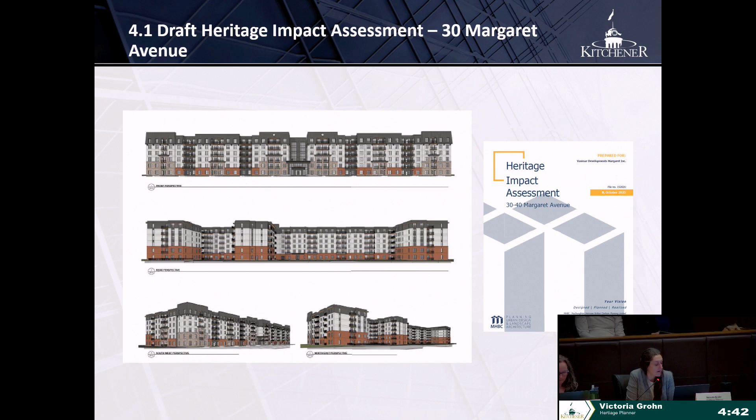The HIA is a required submission of a full site plan application. The development proposal contemplates a 6-story building with 261 residential units. This property may be familiar to some members of the Heritage Kitchener Committee, as this is the third development proposal that's come forward on this site.

As a reminder to the committee, no decision on this development will be made this evening, and the report is still in draft form. The purpose of circulating the HIA to the committee is to receive comment and feedback on the development proposal, and for staff to take back these comments as we continue to undertake a review of the application and work through the site plan process.

That concludes my portion of the presentation, and I'd now like to turn it over to Christy Kirwan and Dan Currie from MHBC to present the draft report to the committee. Thank you.

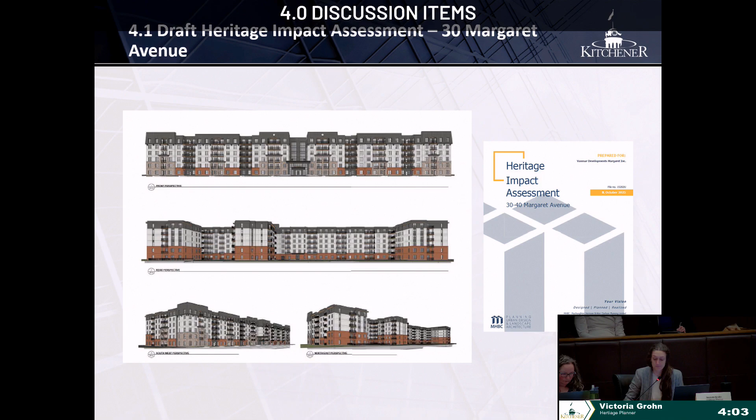So we have our delegation, and then Dan Currie and Christy Kerwin. Are you here? Okay, thank you. So Dan, you're going to do an overview then of the presentation. My mic is on. Just doesn't come with the red button.

Thank you, Madam Chair. Christy and I are with MHBC and prepared the Heritage Impact Assessment. Also with me from MHBC is Andrea Sinclair, who is planner on the file dealing with the site plan application. Paul Levesque and Catherine McCutcheon are also here representing Vanmar, the developers proposing to develop the building. If there are any questions that relate to their areas of expertise, they can assist.

So I've got a few slides. I'll endeavor to move through several of them fairly quickly and not repeat the overview that Victoria gave. But this is a large parcel on Margaret Avenue that I expect the committee and the members of the public here are well familiar with.

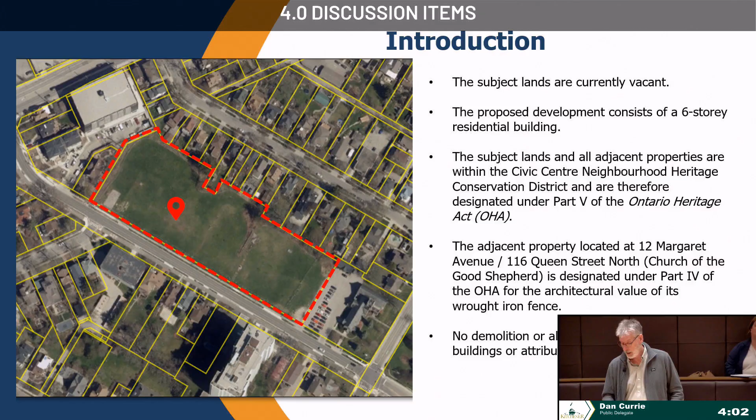It's been vacant for many years. There were a number of historic buildings constructed at the same time as most of the rest of the neighborhood that were demolished in the late 1980s, and the property has been vacant since that time.

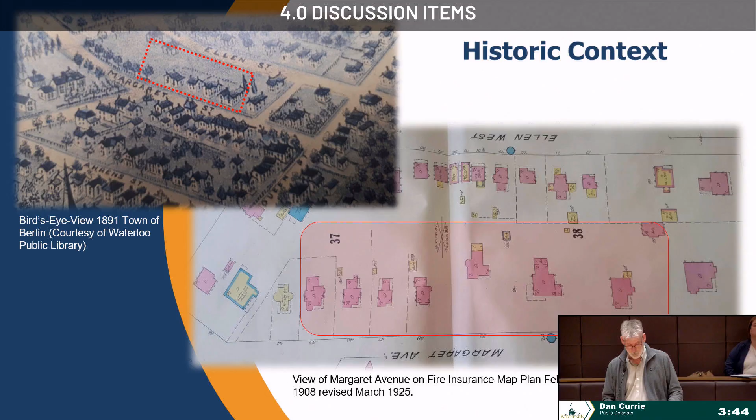As Victoria mentioned, there have been other proposed developments, one as recently as 2019, where a similar size building, a 6-story building, was proposed and ultimately received heritage permit approval. There have been others, but that one is maybe the most relevant in terms of being similar in form and massing to this building.

What is proposed, the current proposed building, is, as Victoria mentioned, 6 stories. There is a level of underground parking. The materials are limestone veneer, red brick, and steel. Paul has brought a selection of the materials and is here, so if you have questions about them or want to know anything further, he can certainly assist.

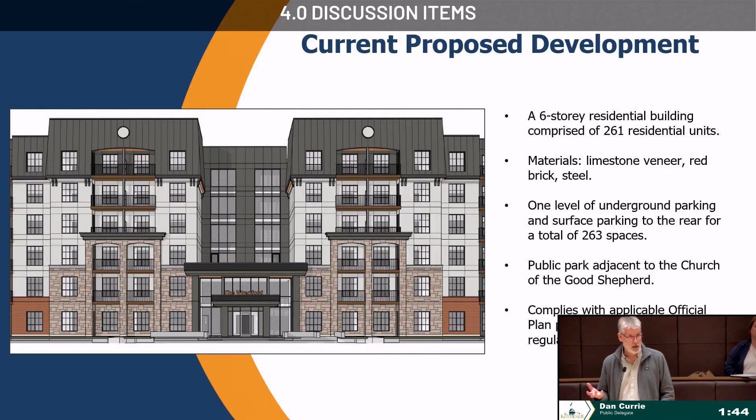A couple of the differences from the 2019 proposal is that there's a public park proposed adjacent to the church that abuts the building. In terms of planning approvals, the proposed development complies with the in-force zoning regulations. So what's required is site plan approval and the heritage permit, but there isn't a need to amend any of the zoning regulations regarding height, setbacks, parking, or other things.

This is a site plan looking down from above in plan view of the proposed building, shown in brown. It shows up here in light green or pale yellow for the park on the right-hand side of this figure, and the surface parking is shown in gray.

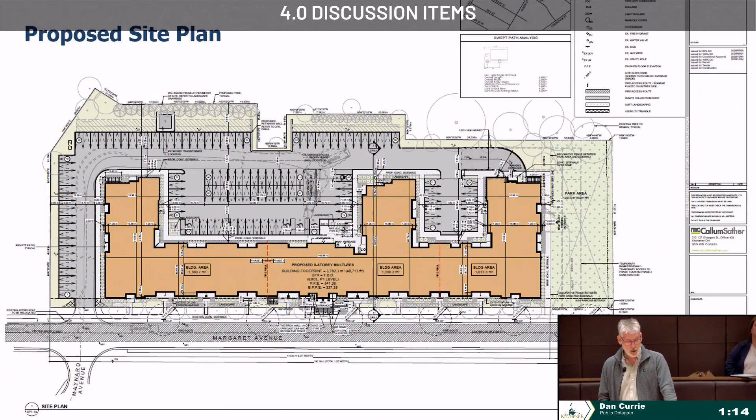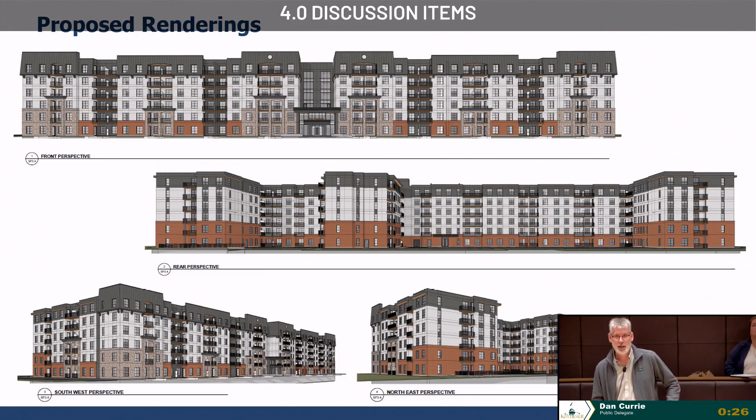Is that the gong? I'm at my 5 minutes, Madam Chair? Okay, I will go very quickly then. We can come back to many of these slides if you wish, if there are any questions.

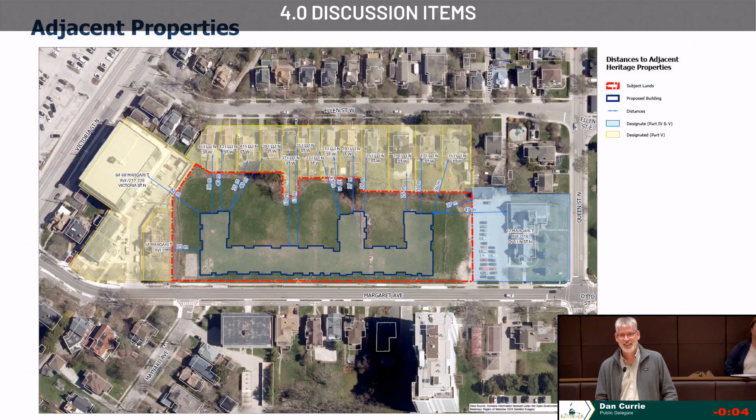Can you sum up in about 3 points? I can. What I will sum up with is there was an angular plane analysis conducted in 2019 that evaluated the location and height in response to adjacent buildings and properties. We've done the same thing here. This building is somewhat shorter, and it equally meets the angular plane analysis.

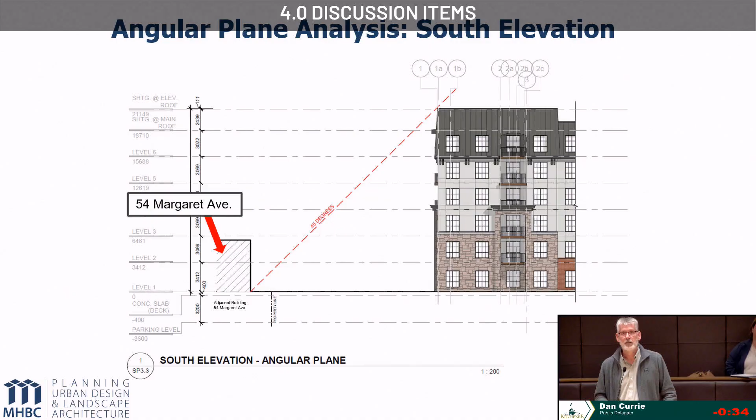The purpose of the angular plane is because there is one of the policies specific to the Margaret Avenue area, one of the guidelines, the third one down, stating that building step backs are encouraged for any development greater than 3 to 4 stories in height. There are no step backs proposed on this building. Instead, the angular plane analysis shows that the same thing can be accomplished simply by the placement of the building in relation to the neighboring properties, without the need for a step back.

And that was the same analysis done in 2019, which was ultimately approved.

Lastly, these 2 charts on my slides are the policies and guidelines that apply to the Margaret Avenue area, a site-specific set of policies that only apply to this property. This is incorporated in detail in the HIA, which complies with all of those.

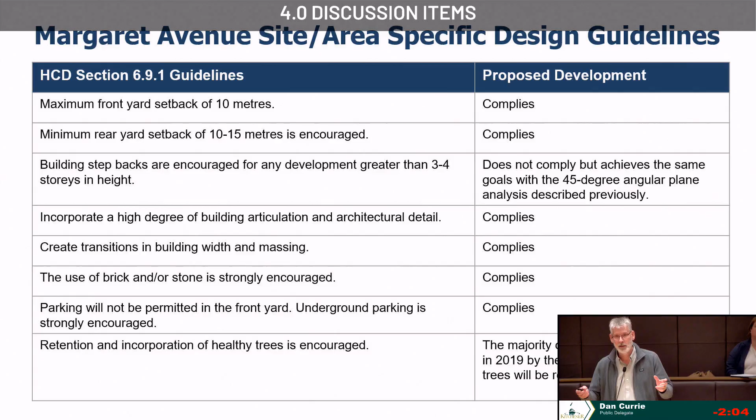The only other thing I'll mention, knowing I should end within the next few seconds, is that there's both a policy and a guideline regarding retention of healthy trees. There were a number of trees on this property prior to 2019 as part of the previous redevelopment. The ones that had to be removed were removed. There's a number around the perimeter that still exist, and the proposal is that they will be retained. You can see on the site plan that that's the landscaped open space and amenity area.

That's the intent. Lastly, the conclusion is that there's no impact to adjacent properties. The proposal meets the guidelines and policies specific to Margaret Avenue. There is a recommendation for vibration monitoring and construction fencing to ensure adjacent properties aren't damaged during construction. Additionally, now that there's a park, there's an opportunity for some commemoration through the naming of that park, should the other city departments think that appropriate.

So I went quicker than I wanted to, but hit some of the key points. Obviously, there's a lot there. Happy to revisit anything through questions, both for me or if there are questions for the developers. But thank you for allowing me to go a little bit over time, Madam Chair.

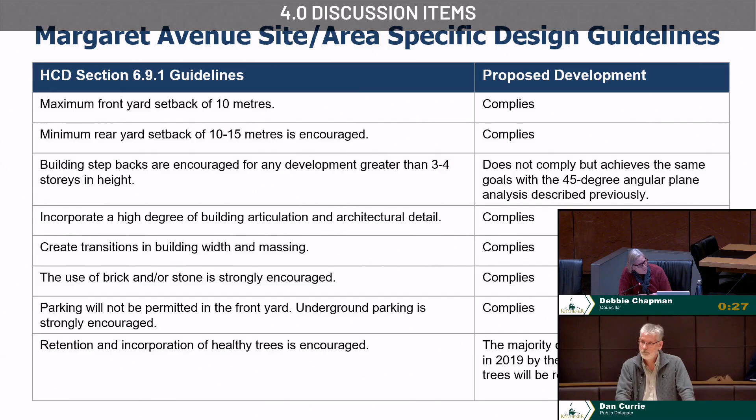Is there any attempt to conserve, replicate, or honor the heritage attributes of the homes that used to exist there? Are you asking about the homes that used to exist on the property, or the homes that surround the building? No, the ones that used to exist on the property. There's no attempt to replicate the houses through design, given that they're single detached houses. Replicate probably isn't the right word, more like to honor them. Okay.

Yeah, there's the design of the building, and if you want, we can go to the detailed site plan and I can show you. The front facade, the first level units, have direct accesses from those apartment units to the street. That was done purposely, not to replicate the houses that previously were there, but we've got a neighborhood of single detached lots that are relatively narrow and long. So having ground floor openings with sidewalks that go out to the street conveys some of that similar intent, trying to do a vertical distribution of the property, of the building, given that it's very, very long.

The only other thing I would say is that the park gives an opportunity to provide some commemoration around the ownership of the previous properties, and we've identified that in one of the recommendations. Okay, I can keep back in if there are other questions.

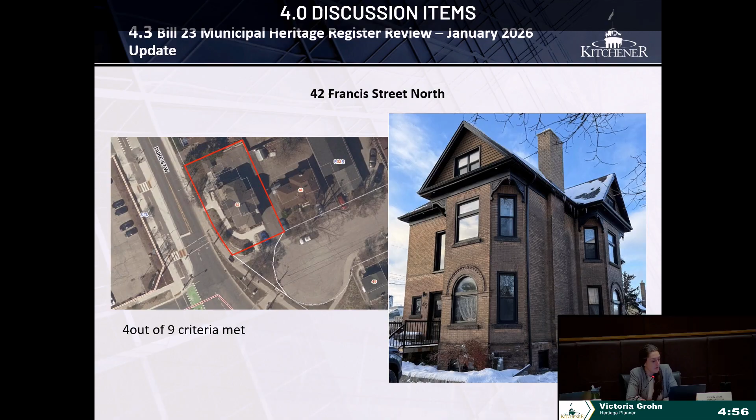So the property addressed as 42 Francis Street North contains a 2-story early 20th century brick house constructed in the Queen Anne architectural style. The building is situated on a 0.17 acre parcel of land located on the corner of Francis Street North and Duke Street West.

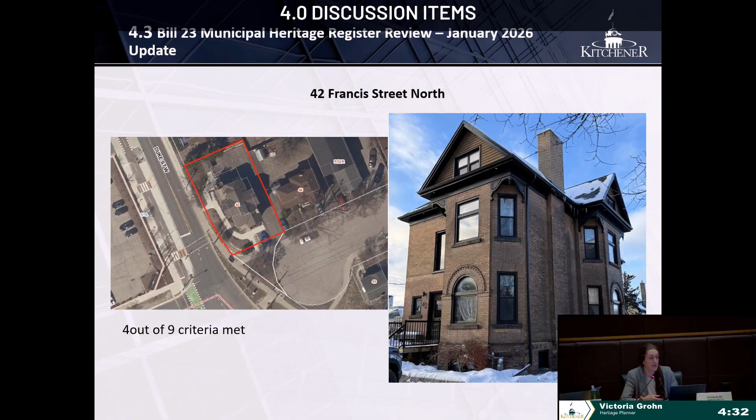And the property has design, physical, historic, associative, and contextual value and meets 4 out of the 9 criteria for designation.

So the property has design physical value as it is a representative example of the Queen Anne style of architecture. While the building has undergone alterations over time, the architectural style of the building is still legible, which is why we feel that this building is still representative and meets that criteria.

The property has historic associative value as the building was originally owned by Daniel Hibner, founder of the D. Hibner Furniture Company. He was also mayor of the town of Berlin in 1894.

So the updated statement of significance that was included as part of this report identifies that criteria 6 is also met. However, after looking into this a bit further in preparation for this meeting, we know that Daniel Hibner was the original owner, but we don't necessarily know if he designed or built the house or if he hired someone to design or build the house. So it's unclear to us at this time whether that criteria is actually met.

And so, given that we haven't been able to definitively determine if there is any historical or associative value related to a builder, designer, architect, etc., we have decided not to include this particular criteria as one of the ones met for this property.

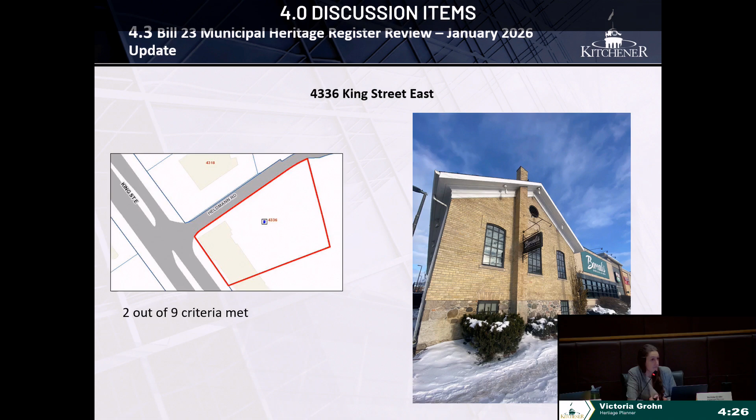The property is recognized for its design, physical, and historic associative values. The design and physical value relates to the architecture of the old schoolhouse. The design, composition, craftsmanship, and details of the building result in a representative example of Georgian architectural style. The building is in good condition and is one of only 4 remaining one-room schoolhouses in the city of Kitchener, making it a rare example.

The historic and associative value of the subject property relates to the former school known as Pine Grove, which once served the localities of Limerick, Pine Bush, Freeport, and Little Paradise. A log schoolhouse was first built in 1809, followed by a wood structure in 1855, and the current brick building was constructed circa 1889. The log house is reported as the first schoolhouse in the county, while the current brick building served as a school from circa 1889 up until the mid-1950s.

Staff has determined that the property does not meet any contextual value as the area has undergone immense development over time. While the building is still in its original location, all surrounding context to this building has been lost. That concludes my presentation on this particular property. Thank you.

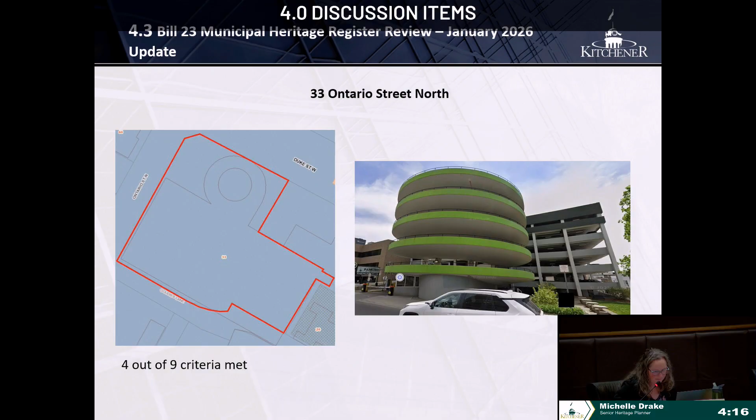With respect to design and physical value, the property meets 1 of 3 criteria. It has design physical value because it is a representative example of a parking garage designed in the brutalist architectural style, characterized by its functional and utilitarian design with its open air deck and exterior helix exit ramp. This type of architecture gained momentum in the 1950s and presented economic advantages since ventilation systems were not required, fire codes were relaxed, and facades hiding parking were no longer required.

The garage itself is in good condition and features a rectangular plan and adjacent cantilevered exterior helix exit ramp, cast concrete facade on Duke West and Ontario Street North, including decorative details emphasizing horizontal and vertical lines, the utilitarian open air deck design, and approximately 9 meters of the Goudies Lane cast concrete facade with vertical lines and the Electrohome mural. That mural was part of the Kitchener Downtown Mural Program, which operated between 1995 and 2002.

It was a mixed media plaster installation designed by artist Christina Piori, sponsored by Electrohome, and entitled 'Electrohome Since 1907.' It was completed in October of 1995.